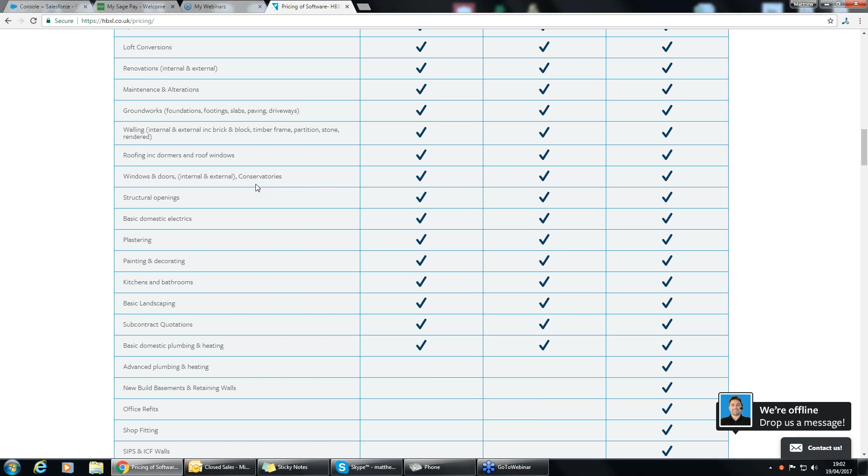So we have a PVCU bonus pack that we work with a company called Crystal. Your structural openings - now it's going to be able to quote for the likes of a steel, however you're still going to need the engineering, the engineer's report to sort that out as well. You've got your basic domestic electric, so that's first fix and second fix. Your plastering, painting and decorating, kitchens and bathrooms, basic landscaping.

Your subcontract quotations, basic domestic plumbing and heating. Then where the total toolkit and the standard stop and the advanced and the ultimate continues, you're looking at advanced plumbing and heating, so that's underfloor heating systems, boiler systems, RADs. New basements and retaining walls, office and shop refits, and SIPs and ICFs, so your structurally insulated panels.

Now, you may need the standard edition, but you also may need new basements and retaining walls. What you can do is you don't have to upgrade to the ultimate from the very beginning. You can add this in at a later date or when you need it.

Where it becomes similar again, you're looking at professional quotes covering letters and T's and C's, automatic production of 80+ professional reports, live material links to the likes of Jewson's, Travis Perkins, Graham, Keyline. So if you have trade accounts with these, what we can do is we can actually link your prices in, so there's not going to be any major faffing with prices because your agreed terms will be in the software for you.

It's going to give you a Gantt chart, labor schedules. It's going to tell you how long the job's going to take and what jobs are going to be in motion as well.

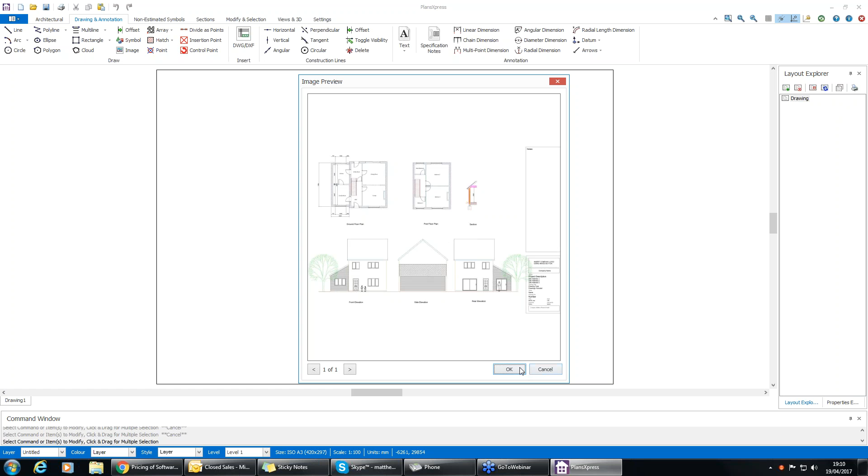If I click Open, it's going to give you an image preview, so you can start seeing what you're going to be drawing. I'm going to be drawing this extension on the side of the house—this one here, and this is my house to begin with. If I click OK, now the software is going to tell you what you've got to do next.

It's got this nice command window down in the bottom left-hand corner, saying give first corner point, which is going to be down here. As long as you hover your cursor over the bottom left-hand corner, this little blue box will turn up saying origin. Click once, and then you can drag all the way to the top.

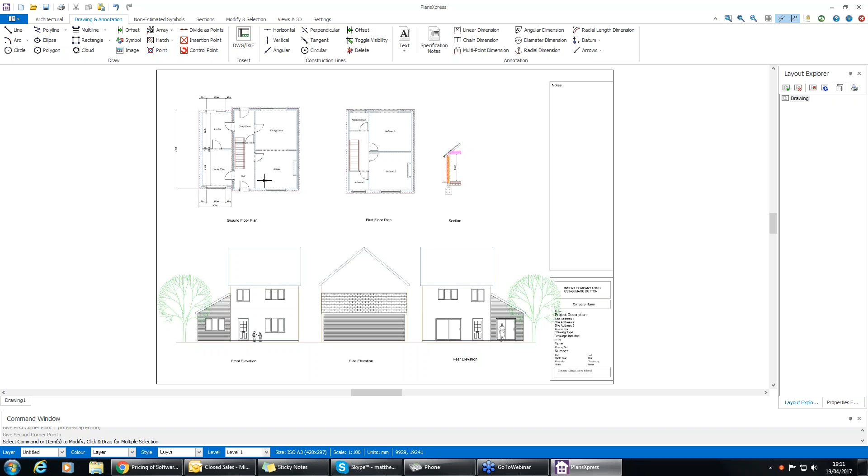Now you can see that we've got the PDF in there. It's still got no information—all it's got is just a nice picture. This could be a picture of my mum and dad for all I know, but I'm not going to estimate them.

Now the one thing you want to make sure of more than anything else is that you've got a scale on there of what something is in millimeters—it makes your life a whole lot easier. Because knowing the distance between two points is going to make sure you understand which scale you're actually working off of. To do that with the software, we have this tab here that says linear dimension, which tells you the distance between two points. I know that between here and here, that should be 1800.

So if I just click once, to make sure it's nice and straight, I can hold the Shift key so that it goes nice and straight. I can click inside there, and it's telling me that that is exactly 1800, which is perfect—that's what I want to know.

Now, the software lets you draw freehand, so you can start doing your own designs, and you can draw freehand over a trace as well—it's entirely up to you. But to make your life a little easier, we have construction lines, because the software uses something called a snapping tool, and you'll see how that works in a moment. It's just like when I went to that origin point in the bottom left-hand corner.

So first off, the construction lines are up here. You've got everything from horizontal to vertical, angular, tangent, perpendicular, and circular as well. So if you have those unique builds or architectural drawings that you need to estimate, you can use this. You can speak to the tech team as well just to make sure everything's accurate, and we can help you out as well. So first off, horizontal lines.

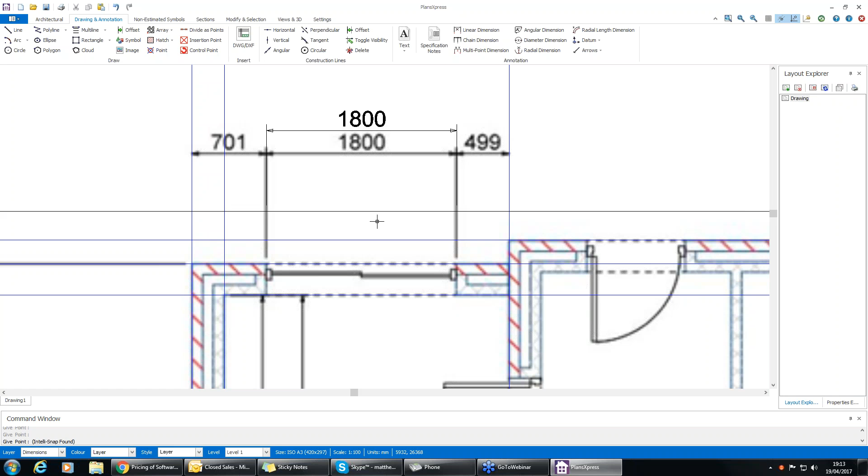What I can do is, as long as you've got a mouse scroller wheel, you can zoom in and out, which is quite handy. And if you click down the mouse, you get this little hand that grabs, so you can move yourself around. Oh, my mouse has decided to throw me all the way up. I don't know why my mouse is doing that. Terribly sorry.

What you can do is go down to the bottom. Oh, I hope this isn't constant. Terribly sorry, guys.

And there we go, we've got the walls nice and sorted out. So what we've got now is all of our construction lines in place, and we can start snapping to the corners. But like I said, I wanted to make this wall non-estimated first off.

The way I can do that is go to where it says Architectural, then External. You've got these tabs at the top of the screen: external walls, internal, feature masonry, doors, windows, openings, stairs, flooring, roofs, extended roof, attic, drainage, all the way through to chimneys and fire stops. So this first one, I'll go External and drop that down.

I know it looks like a brick and block cavity wall from here, so I'll just select brick and block cavity wall. It doesn't really matter how high it is right now because, as I said, it's going to be non-estimated. So what I've done there is selected one that's a single story, and these dimension wizards come up. The reason these come up is because this is the information it's going to take into EstimatorXpress, which I'll go through in more detail in a second. But for the benefit of this non-estimated wall, I'm just going to hit Accept Defaults.

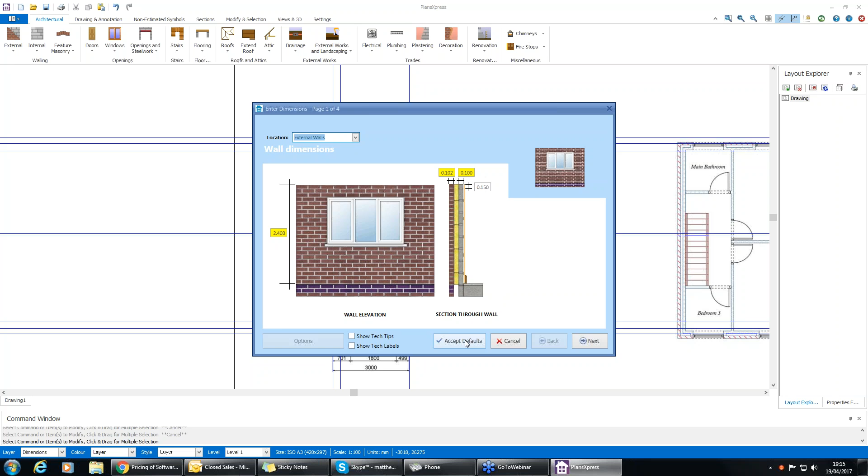So you're just basically putting in a line for the sake of it right now, and it's going to use a snapping tool. It snaps directly into that corner whilst my mouse is over the top of it, which is nice and handy. Now if I click there, I've got an arrow pointing right, telling me that the wall is pointing to the external wall. If I wanted to go down, the wall is now on the wrong side of my construction line.

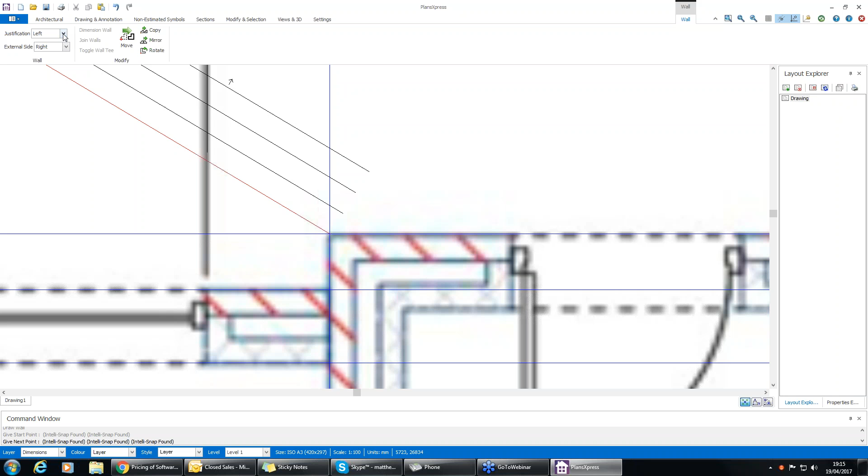This can be an accident that anybody can do. That's why in the top left-hand corner, if you follow my mouse, we've got Justification and External Side. The external side's on the right-hand side, however the justification isn't, and that just means where my corner is. So if I just change that from left to right, I've now got that external wall on the right-hand side, and I can pull that all the way down to the corner, click that in place, and if I right-click, the wall's going to go away.

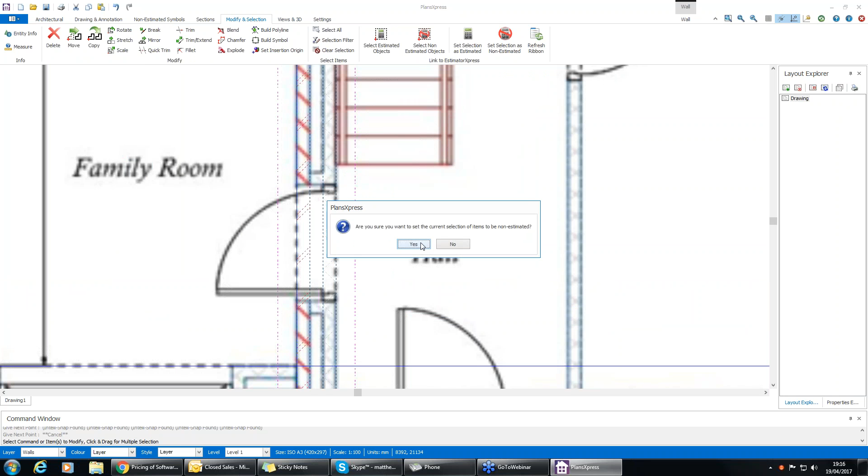Now, to make this non-estimated, all you've got to do is click once on this wall, go to Modify and Selection, and go Set Selection as Non-Estimated. Once you've clicked Yes, this wall now has no information in the middle of it, it's gone nice and bare, which is quite handy. Everything else you draw after this will be estimated, it's just this one bit, which is quite handy.

Now, going from here, we're going to start building the wall for the extension.

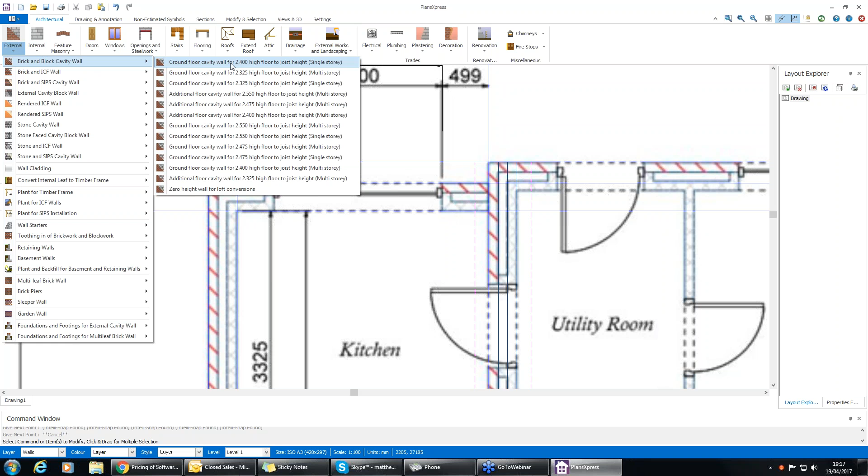Okay, so first off, going to the external wall. You'll know by how your architects design the wall, how you've designed the wall is how it's going to be built. So if I go brick and block cavity wall, single story, it's going to say it's 2.4 meters high. Now, these dimension wizards, I'll go into a bit more detail. The reason you've got the height and thicknesses is because this is what's going to take into EstimatorXpress, this is what it's now going to estimate for.

And then you've got the thickness of the external wall, 0.1025, and then the internal leaf thickness as well. What we do have for you guys is something we call Show Tech Tips and Show Tech Labels. If I turn this on, every time you tick a new box, this information in the top right-hand corner is going to tell you exactly what you're changing. So you may know exactly what you're changing from the images on screen, however somebody may be learning next to you, so it's definitely worthwhile.

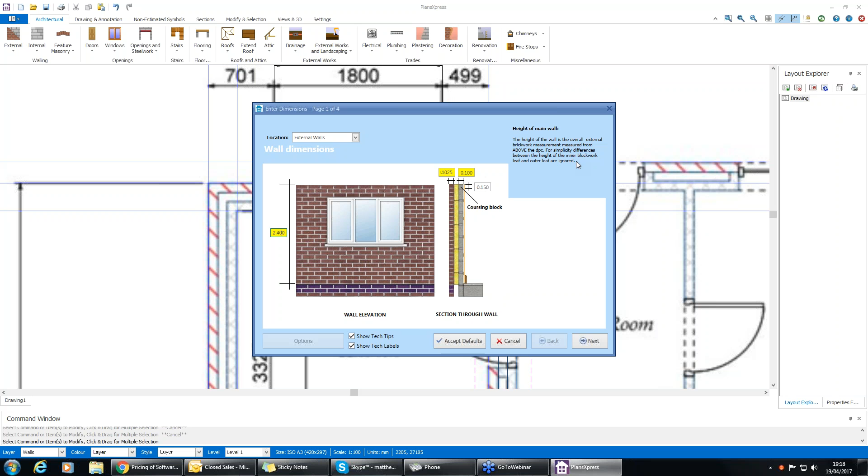So clicking next, it's going to go into the foundation details. We're saying 0.6 meters wide and 0.9 meters deep. The luxury of this is we've been working on the software for the last 17 years, working with the Federation of Master Builders, Guild of Master Craftsmen, companies and affiliations like this, we've been able to get most to building reg standard. So you're going to see a lot of it that you're already dealing with already.

Then you've got the luxury of saying, okay, we're going to be using structural concrete thickness, or you may be doing mass concrete thickness, so you may be piling it in, depending on how you do it as a business. And then the software is going to ask, is it going to be plank and strut excavation, so are you going to be supporting it? And what is the bulking of the excavated material?

Now this differs from company to company. Usually it's 1.5 because we understand soil coming out of the ground is going to expand by half. And if it's concrete, it's usually a bulking factor of 2, because when it goes into the skip, it's not going to have as much space in there as well.

Clicking next, going into the footing details. So the splash course depth, brickwork depth below splash course, height of the blockwork to outer leaf, cavity width, cavity fill depth, height of the blockwork to inner leaf, height of the coursing blocks to inner leaf, then height of the trench blocks as well.

And the software is going to ask you whether it's going to be insulated and is there a separate DPC. If that's a no, all you've got to do is just change that Y to an N, and then it's not going to quote for it when you put it into Estimator Express. But for the benefit of the demonstration, I'm going to leave that in as a yes.

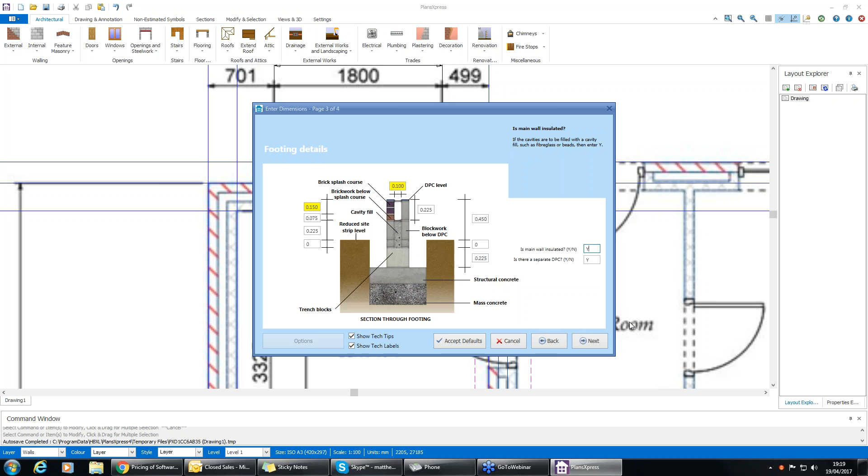And the last question it asks is the plastering and decorating. Are you going to be plastering and decorating? Yes. Number of skirting boards to be used on each wall is 1. Is the main wall skirting going to be primed? Is it going to be decorated? So it's going to be taking in your primer in that as well.

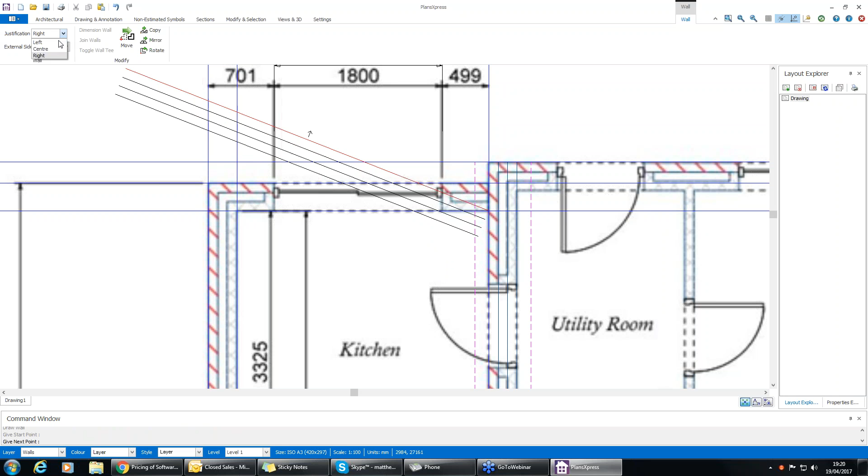And once you've clicked finish, what you can do is you can hit that, and then they're saying give a start point. So I'm going to go right into this corner here, saying my wall's on the wrong side again, so I can just change that justification to left. And that way now I know I'm going to be going into the internal walls by scrolling in and out.

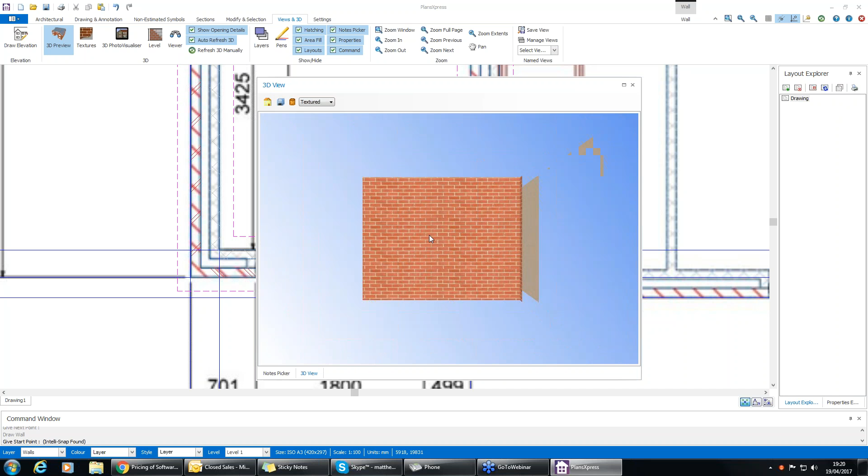And once that's there, I can then go, which is quite handy, Views and 3D, 3D preview, and if I just drag this into the middle and make it just a smidge larger, you can start seeing what we've begun to estimate. And again, like I said, this wall is now estimated, everything else is, and you'll see that when we take it into Estimator Express.

All right, instead of jumping back and forth in and out of the actual picture itself, what I'm going to do is add a few more bits and pieces so we can start seeing it in a much nicer view.

Okay, next off, what we're going to do is add flooring in. So just go to the flooring tab, hit the drop-down box, and you're going to have the list of floors that you can do. Everything from a suspended floor through to a floor cassette, floor slabs, screeding, if you're going to be doing commercial carpeting, floor tiling, depends on what you're going to be doing.

So for this one, I'm just going to go floor slabs, extension slab, and it's going to be unreinforced or reinforced. I'm going to go reinforced for this one. Turn on those tech tips and tech labels. Thickness of the sand blinding, thickness of the sub base.

Thickness of the slab. Is there a damp-proof membrane? If there is, what's the overlap of that? Usually 0.5 meter. Is there insulation to the underside of the slab? Is there reinforcement to the bottom of the slab? Is there reinforcement to the top? Is the slab power float finished, yes or no?

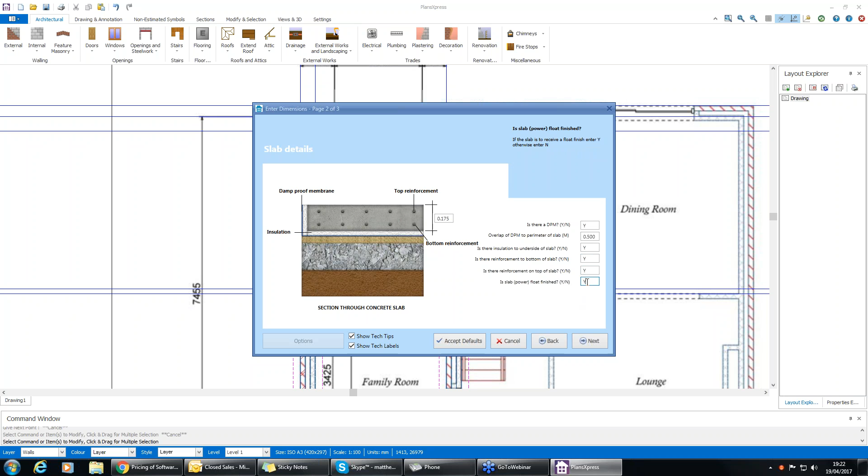Now on this next page, the software's going to ask you the number of hours that you're going to be requiring the excavator, the plate compactor, the wheelbarrow. The reason why it's asking you these questions is because of the undeniable fact that wear and tear happens, and you're going to be paying for a couple of these things as well to have them brought to and from site. Now it seems it's all zeroed out because the software doesn't actually know how big the slab is yet.

Because it could be something that you can do in a day, or it may be something you have to do over the course of two days. But it seems you haven't drawn it in yet, so it doesn't know. You can add this in yourself if you like, but you can leave it at 0 and the software will do the rest of the work.

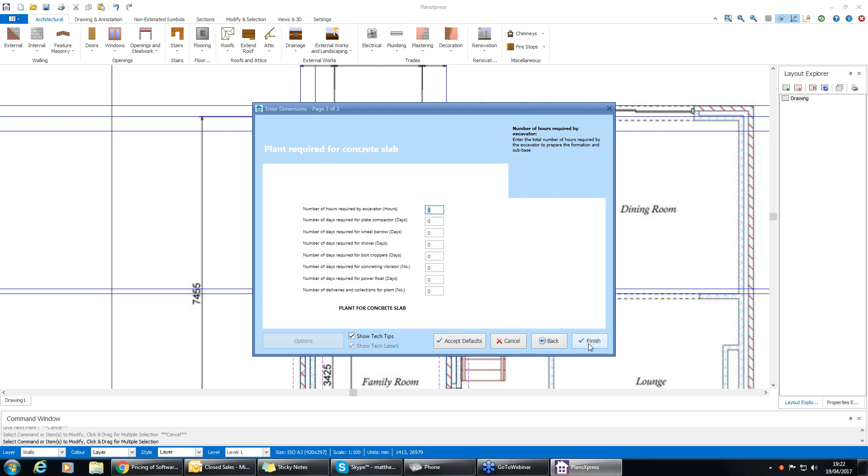So if I hit finish, the software is then telling me to give the first corner of the floor on supporting wall, so I can go once, second corner, and then instead of going all the way around, I can just drag it all the way down to the bottom, which is quite handy. I can pop that one in there.

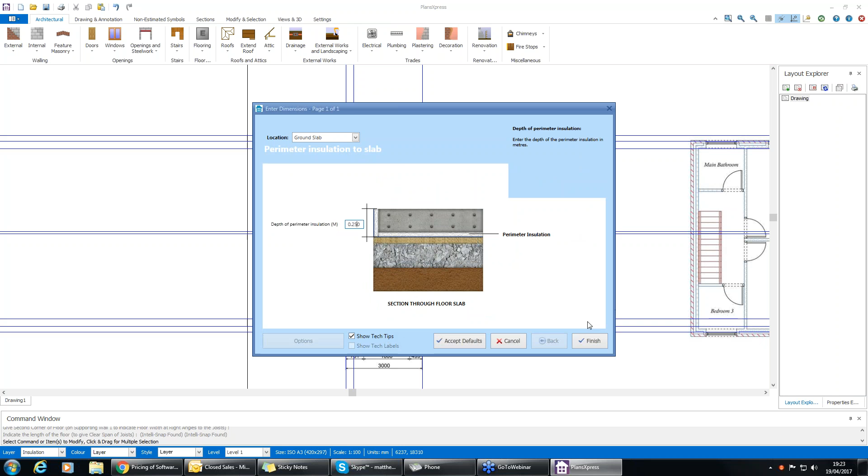Do I want to place perimeter insulation around the slab? Yes, I do. It's just going to ask me about the depth of the perimeter insulation, and then I can start going around, getting the corners here. And now, as you can see, that pink line has turned into a nice grey line as well.

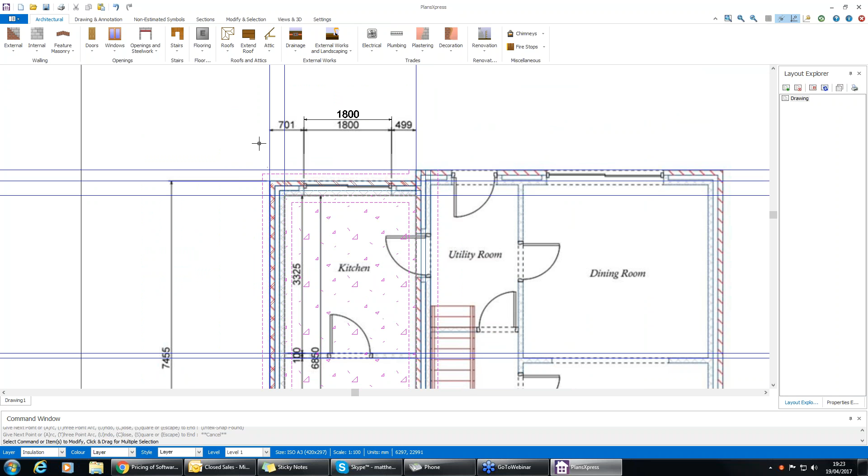All right, going into the internal wall, hit the drop-down box depending on how you're going to be building this internal wall, whether it's going to be an internal cavity block wall, a block wall, a stud wall, or a metal stud partition. I'm going to be doing that one there, and then I'm going to add in the information that's relevant.

The reason why it's not asking for the area of space in this door opening is because the moment you drop a door in through PlansXpress, the software's going to calculate the rest of it. So what we've got there is a wall at 2.4 meters high, 600 mil wide studding centers, and the width of the wall is going to be 100 mil. Does the door opening require a timber subframe?

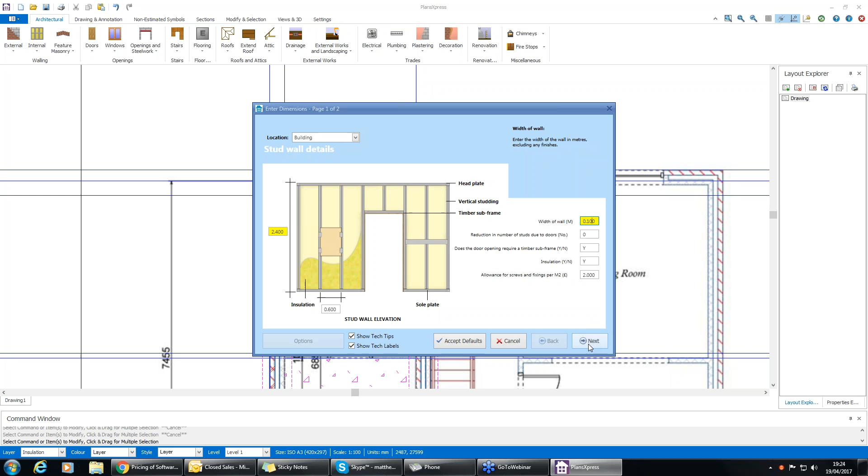Yes or no. Insulation, yes or no. Allowance for screws and fixings per square meter. So every per square meter you've got £2 in there for the screws. Okay, hitting next, stud wall and plastering details.

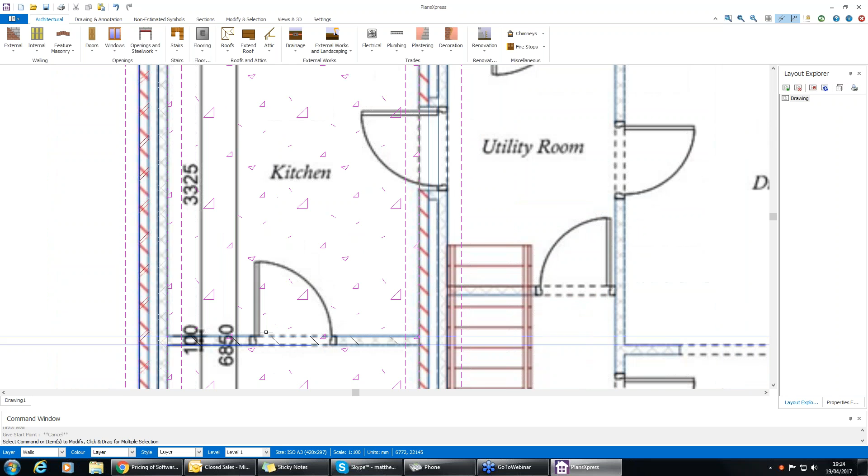Is it going to be plastered? Is it going to be decorated? Is there going to be a skirting either side, yes or no? And once you've hit finish, you can just go in there, click in, go from one side to the other, and now we've got a nice wall in there as well.

So what we've got now, if I go into Views & 3D, is something that looks like this. We've got our front wall, back wall, internal wall, our flooring, and our parallel wall as well. If I hit X, what I can do is I can now add some windows and doors in there.

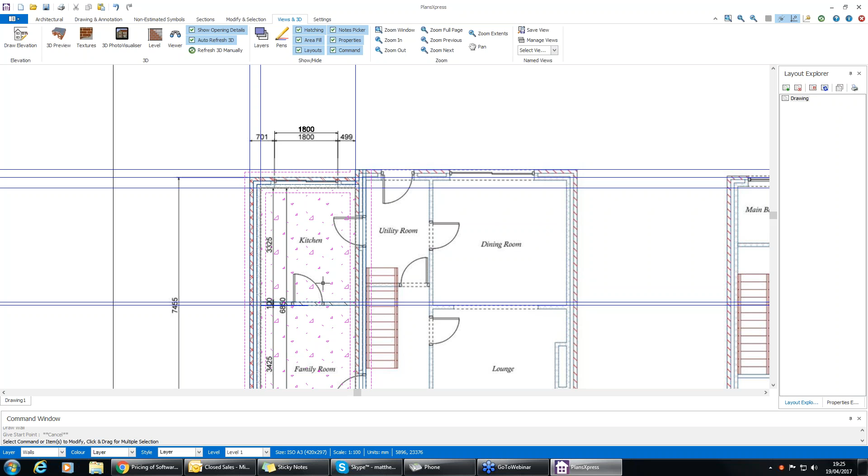So first off, let's go with these internal doors. So architectural, go to the doors. I know they're going to be internal, there's going to be a typical panel door. Now the software is going to ask you whether that's going to go into studding or block work. This is going to determine whether you're going to need lintels and so on.

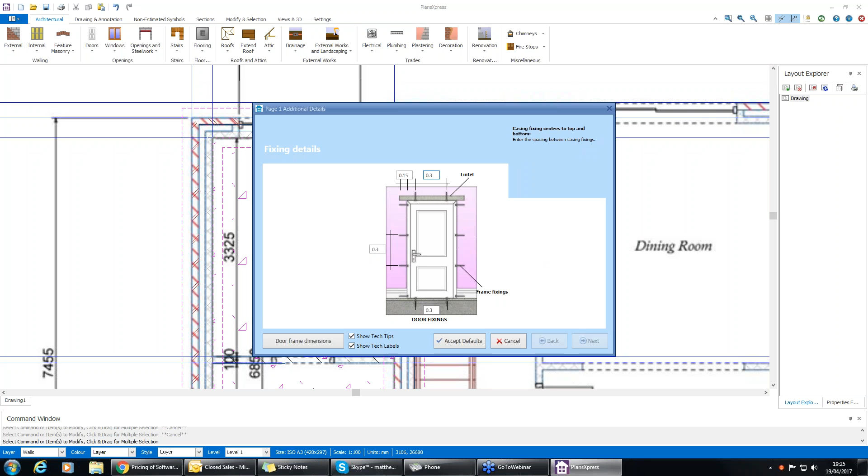So first off, if we go into block work, it's one of those tech tips. So it's going to ask me about the height, the width. If I want to go into the fixing details as well, so I can show tech labels as well: lintel, frame fixings, casing fixings, lintel bearing each end, casing fixings as well, door fixings.

Reveal and jamb details, plastering and threshold details, and the decoration specification as well.

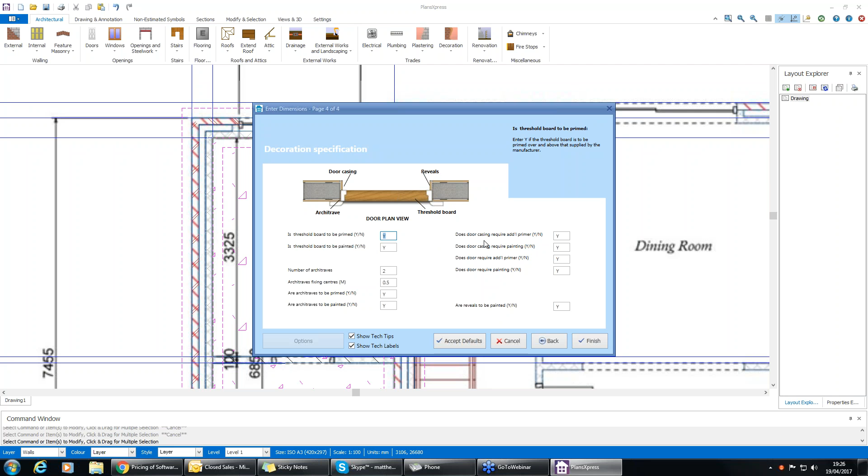Okay, are you going to be priming and decorating? Now the luxury is those 4 pages are the exact same with all doors and all windows. It's going to go into the threshold, okay, your decoration, and so on.

And once I've hit finished, what I can do is I can start pulling that door in there. I can zoom in, make sure that it's right on point. And then the software is going to ask me whether I want to have the door swinging any which way. And it's going to be swinging in that way.

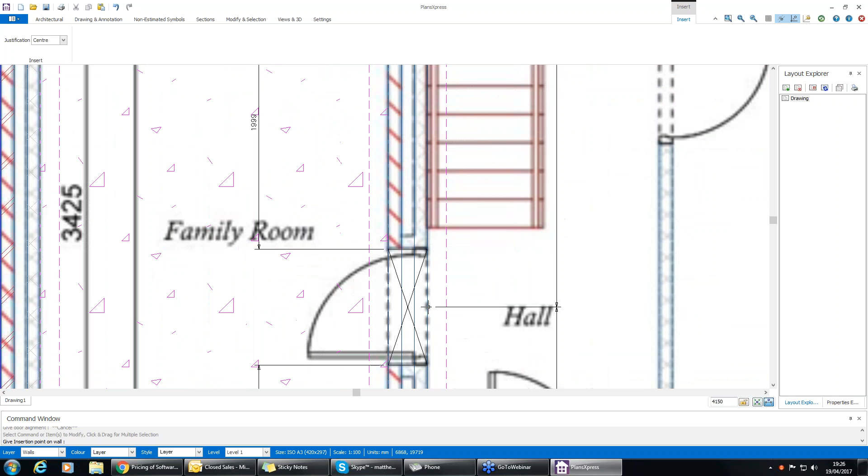All right. And then again, drop another one in there. Going this way this time.

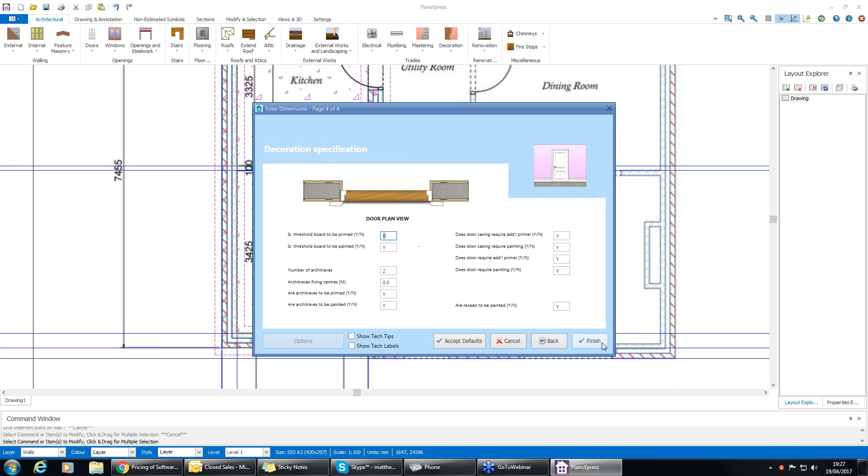Now, again, we can go into the architectural, we can go into doors, internal doors, and then we can go into studding this time. And again, the exact same information as last time, which is quite handy. You know if it's going to be all the same, you can hit finish, and you can start going and making sure that your door is in the right place.

And then views and 3D, you can start seeing some nice white doors there as well, which is handy. All right.

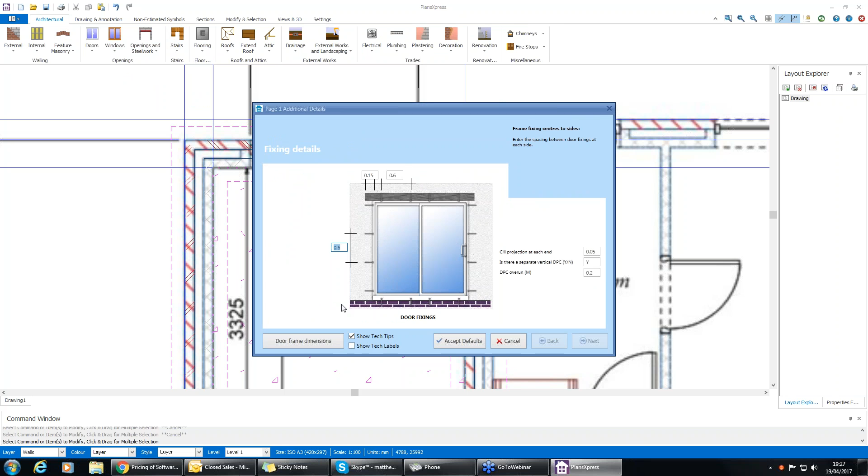Going from here, we're going to have a nice patio door in the back, which is quite handy. So door, patio doors, 1800 mil wide. We select that one. And again, I don't have to reiterate again and again, but it's all the same questions.

Which is very handy. And the moment you've done that, if you zoom in, the door is going to ask you which way you would like it to slide as well. So I'm going to have it sliding that way, which is handy.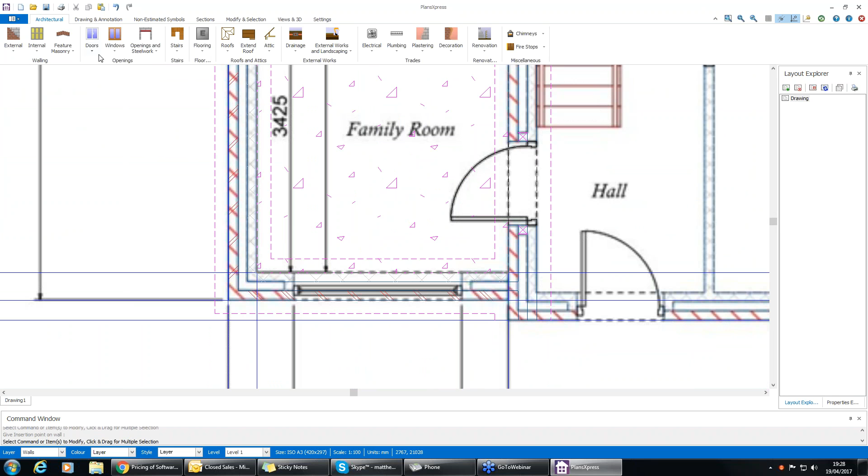And then the front, we get to select a window. Now this can be, oh no, that's a door, sorry. Just looked like a window then. So this could be anything from softwood all the way through to PVCU.

Okay, we do work with Crystal Direct as well, as I said, so you can start choosing and selecting a nice window. Okay, so if I were to do it like that, you can start seeing the windows that we're going to be working with within Crystal Direct as well.

And the luxury of Crystal Direct is if you select one of their windows, what they will do is they will manufacture it and they'll get to you on site. Okay, so that's something that we do like.

Okay, so you can go first off width, make sure that we've got the correct width there. So I know it's going to be 1800. Okay, and I can still start scrolling through. I can select the color.

So if I want it to just be white, we can leave it there as white, or we can have it as black, brown, blue, mahogany, depending on how you want it to look. Okay, the height as well. So we can start saying, okay, then we actually want it to be about, oh no, that's a little bit too short. There we go, that looks a little bit nicer.

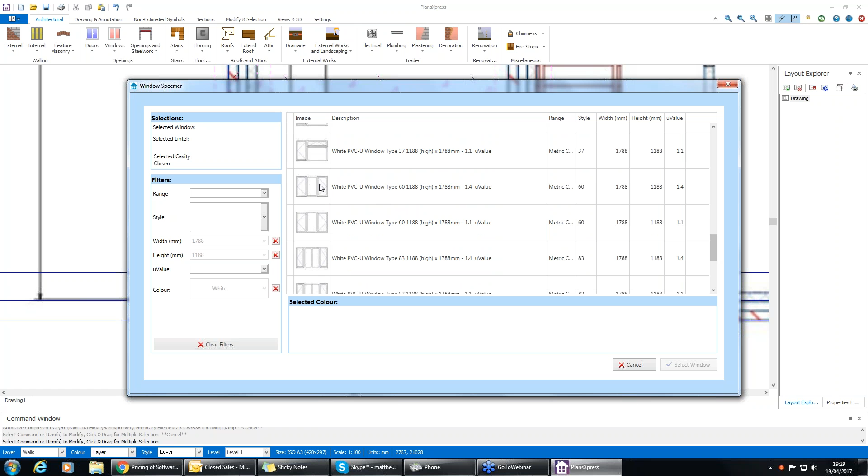Then we can start looking at the windows that we've got here as well. Okay, if I just said, okay, then I want this one here, which is quite handy. I can hit select window, and the software is then going to generate the relevant lintel that it's going to need as well. Okay, so it's going to select it from everything that you've given it, which is quite handy.

And then the cavity closers and that as well. So once you've actually ordered it, it comes with everything that you've actually just seen here. And once you hit select and finish, it's going to ask me the relevant information again with my fixing details.

And then I can drop that window in there, which is going to be quite handy. And what should happen is if I go into views and 3D, it should look very relevant to how we're going to be estimating as well. Okay.

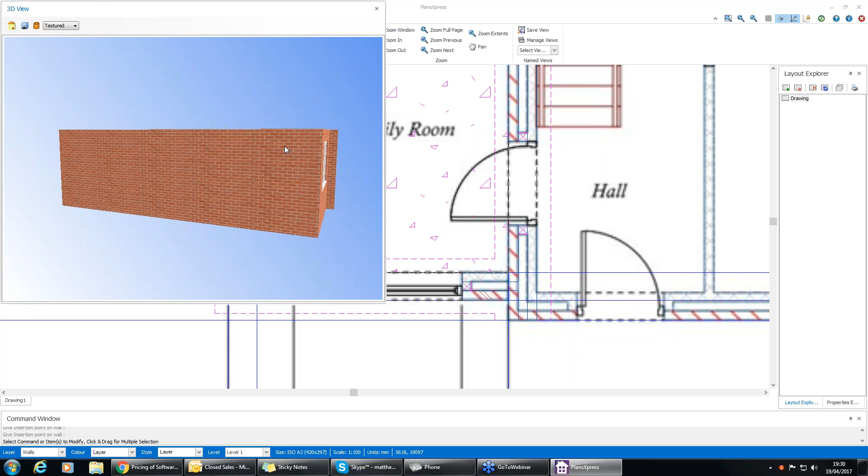You can start popping in some electrical works as well. So if I go electrical, we can have a couple of double sockets, okay, downstairs. And we can start doing that so they point outwards, if I remember correctly.

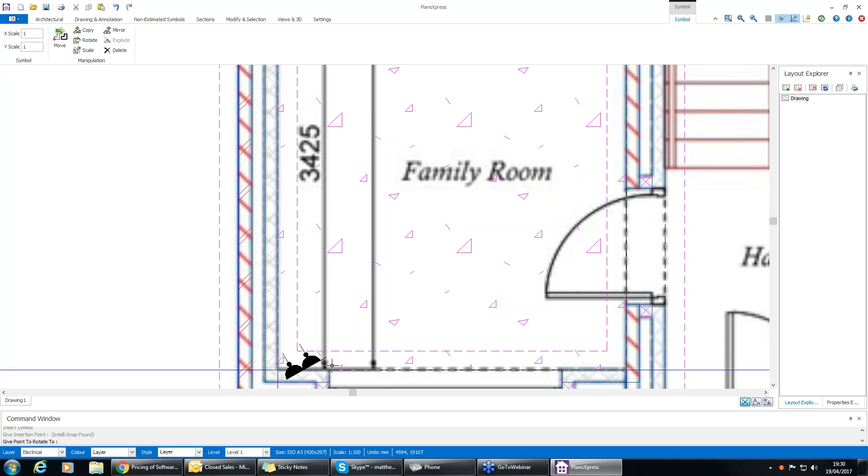So at least that way, you're going to be quoting for your electrics in there as well, which is quite handy and what everybody wants.

Okay, last but not least, you want to stick a roof on top as well. If I drop down a roof, you can have everything from a cut roof or a truss roof, depending on how you're going to be building it or bringing it in. And then you can start choosing the typical pitch as well.

Now the software is going to give you these four pitches. You may have a different pitch depending on how you're building the house. For the demonstration, I'm just going to have a typical 35-degree pitch, but you can change it. So if you want it to be, say, 27 degrees, just change it to 27.

Now, the reason it's starting to ask you about whether it's got an elevation of a barn hip is because right now it's just asking you whether it's going to be a cut roof or a truss roof. It's going to give you all elements of potentially any roof you could be building. So once you do draw it out and get to the very end, it's going to be able to calculate the right roof for you.

Okay, so show tech tips. You've then got height of the gable to underside of the barn hip, thickness of the roof structural information, soffit width of the gables, soffit width to the eaves. You can go into the timber and the roof strap details, so your roof is out there.

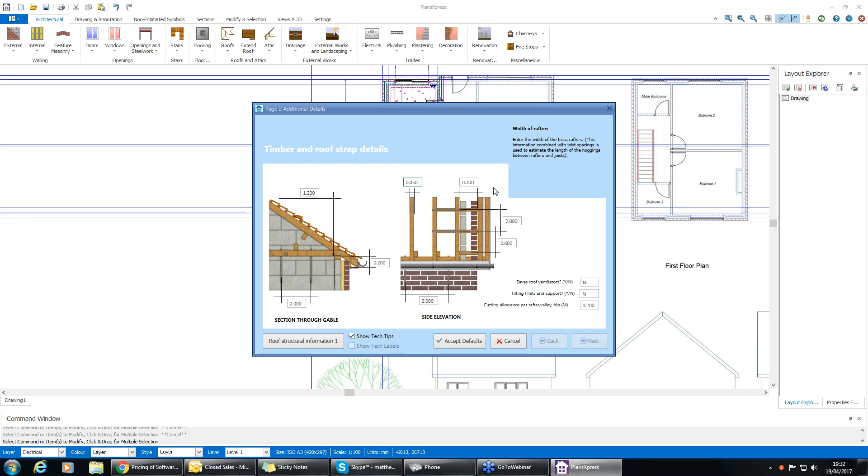You can see the spacing of the joist noggins. You can see the gable straps at joist level centers. It's going to start asking you a lot of the relevant information that you kind of go through yourself. So going from there, you're going to go into the second roof structural information.

So rafter centers, joist centers, height of the barge boards as well. Are there eaves, fascia, barge boards? You can go into the guttering details as well, depending on how much guttering you're going to need.

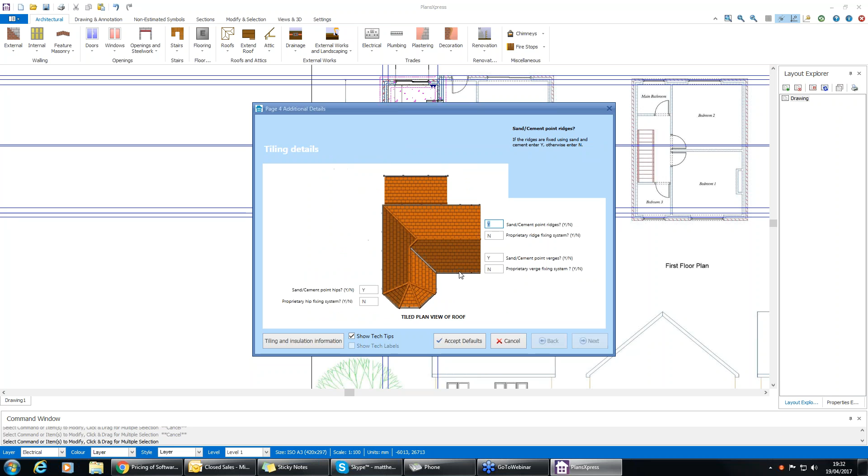Tiling and insulation information, so sand and cement point hips. And then last but not least, again, the roof finishes. Are you going to be priming the barge boards and fascias? Yes or no? Decorating barge boards and fascias?

Most likely not, because it's usually PVCU, and that just looks really tacky when you paint on it, really.

Okay, and once you hit finish, you can either choose an apex roof, a hip roof, apex roof with a barn hip, lean-to roof, or a lean-to roof with a hip end. If you have wraparound roofs, just give us a call and we can actually help you create those within the software as well. That's something we're actually very good at helping with.

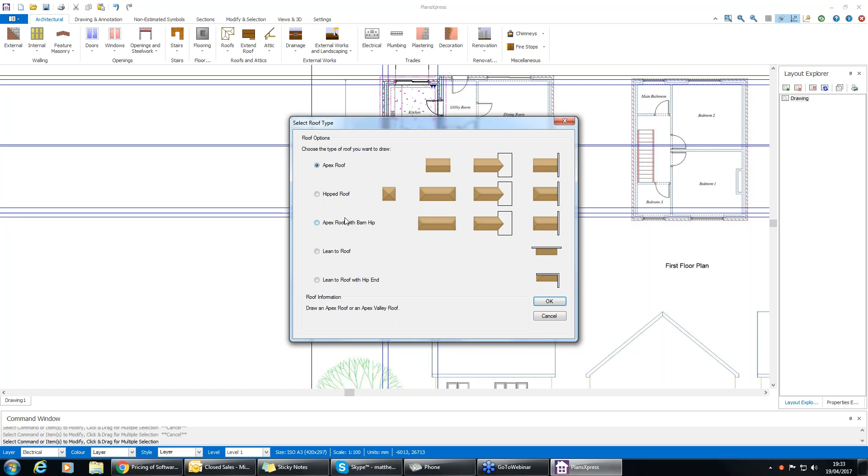Okay, so if I just go lean-to roof for now, click OK. Software's telling me to indicate the line that the roof is on. So indicate the wall line, sorry, it's going to be this wall here.

Go to the outer corner of the building, inner corner of the building for the width, and then — oh God almighty, terribly sorry guys — and then the length as well.

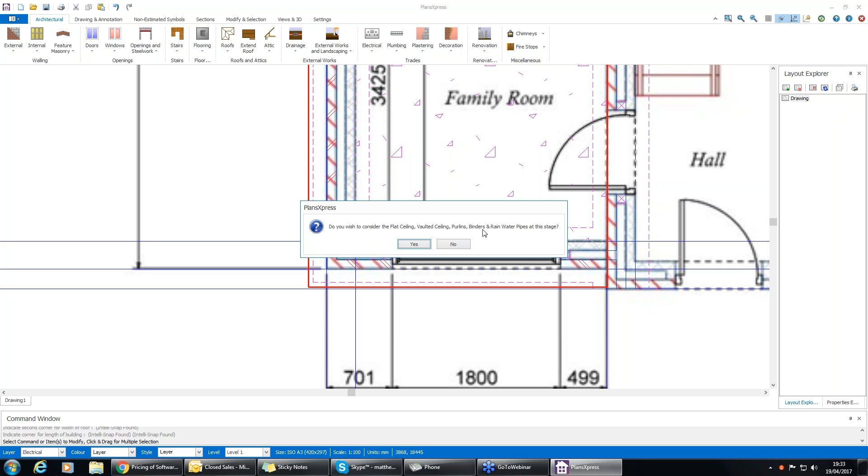And do I wish to consider the flat ceiling, the vaulted ceiling, purlins, binders, and rainwater pipes at this stage? For now, I'm just going to go no, just so we can start seeing this into PlansXpress, to Estimator Express.

And as you can see, it's filled in the gable for you as well, so it's going to quote for that. But you've now got your internals.

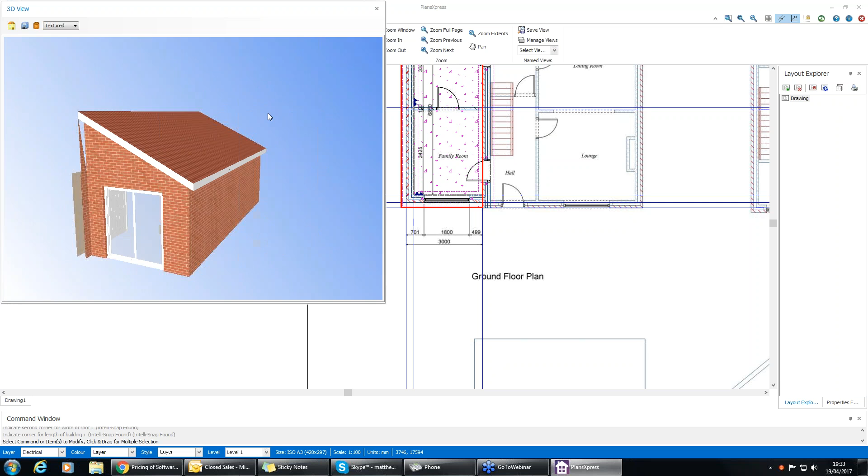And the luxury is, if you're going to be plastering the internal wall as well, depending on whether it's going to be a garage or actually a family room, you can start going into the renovation and the plastering and decoration aspect as well.

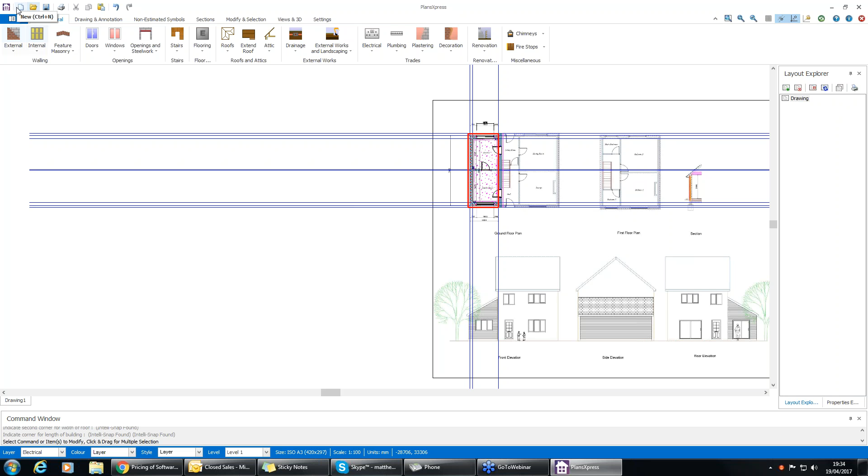Okay, but for the benefit, want to speed this along, want to make sure that we can go into Estimator Express now. And to save this, all you've got to do is just go to the top left-hand corner, hit the nice big floppy disk, which is quite handy.

Select a place where we're going to save it. So if I go desktop, I can go Essentials Demonstration, hit save, and now I can close my way out of this.

Okay, and now what I'm going to do is go into Estimator Express. Whilst that's loading up, does anybody have any questions right now?

Just leave it a couple of moments longer. Okay, no questions, I like that. Must be doing a pretty decent job.

Okay, so this is Estimator Express. We have a fantastic update coming out. I'm not going to be telling you what it is, you're just going to have to wait and see. But that's coming out in June, and we are very excited about it.

What the software will tell you is what version you own as well, depending on these CDs. Now it's not gospel that if these aren't bright, it's not on within your software, so don't live and die by this, but it does give you an idea of what you're running. As you can see, I'm running the Ultimate version, so it's going to be showing everything from my PVCU bonus pack through to the renovation. That comes standard anyway - the basements, office and shop refits, my power pack, stage payment, plumbing and heating, SIPs, and the invoice generator.

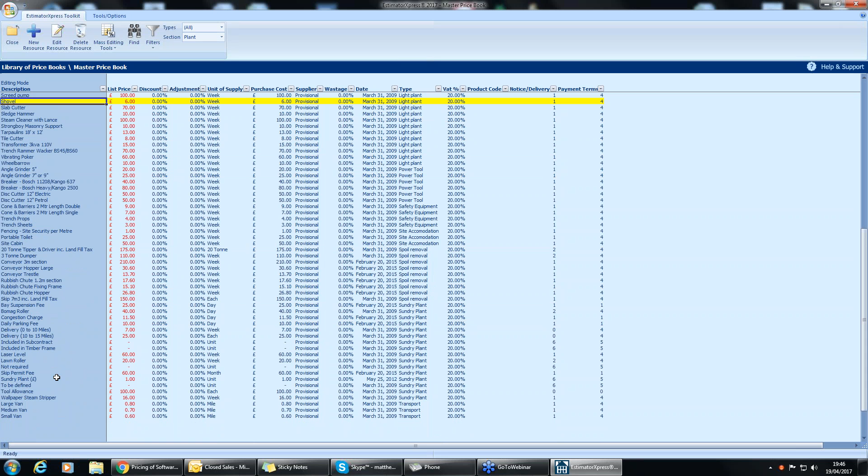It goes into your wheelbarrows, deliveries, parking as well, whether you're going to need to park on site, your skip permits too, depending on how much you're paying for your skip permits. The ones you've got to look at as well are the big ones, so the likes of your £350, your £300 ones.

We've got a JCB digger in here with a driver for a day at £300. Now if you're paying, say, £500 a day for a JCB digger and a man, and you've got the software in here at £300 a day, by the end of the week you've costed yourself out of £1,000, and you'll feel that on the wallet. So just make sure this is correct, especially on the big ones, just to cover you from what you're actually using.

So that's your prices, that's your profit inflation, and now what I want to show you is how the software is going to import and estimate that drawing that we've done within Estimator Express. So just close again, go back, and how to do this is you go into My Estimates.

You've got the cost excluding profit and VAT, cost including profit but excluding VAT, and any comments about the job. We understand that you may be estimating at 1 o'clock in the morning because you need to get something sorted, so there is a box there where you can leave yourself a comment. So the next time you turn on your software, you can go in and think, actually the subcontractor price needs shifting, or plumbing needs reviewing, something like that, because you may have made a mistake. You want to make sure that doesn't come off, so you can leave yourself almost like a footnote.

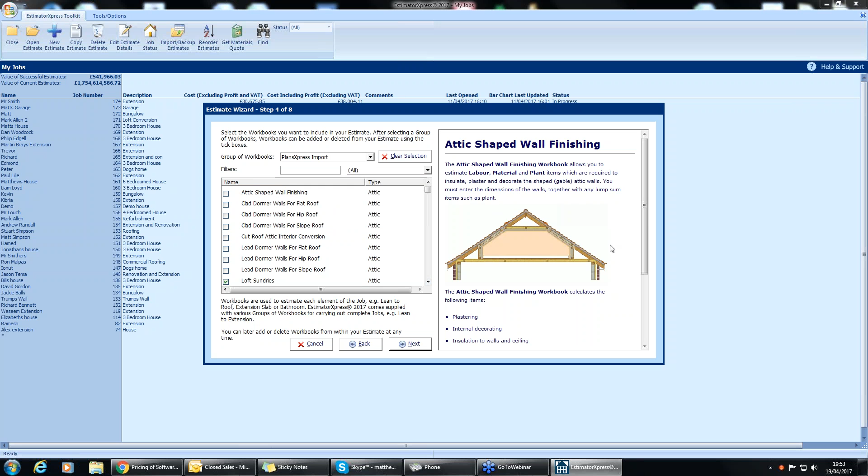But if I wanted to estimate this attic-shaped wall finishing, this little image here is going to tell you exactly what you're going to be estimating for - the plastering, the internal decorating, insulation to walls and ceiling, plus the labor associated with the above.

Clicking next, I'm going to be selecting a start date for the job, so the Gantt chart is going to be a little bit more accurate. So I'll say I want this to start on the 26th of June. And the chart type is going to be a small house - it's going to be a large house renovation, small extension. That's what I'm going to use this time.

Click next, pop in the details - so I'm just going to go Mr. Smith, completely random, why not? And then you would fill out the relevant information about Mr. Smith. Click next, confirming your profit markup.

As you saw me earlier changing that template to 27%, I may want to change it to 30 this time because I want to make a little bit more money off the labor. And then last but not least, your inflation - making sure that's correct.

Once you've hit finish, you get to sit back and allow the software to actually do its work now - it's going to start estimating everything you've drawn up within PlansXpress. Depending on the size of the job you've drawn up compared to what you're going to be estimating, that really decides on how long this will take.

Just going to mute a second so I can have a drink of coffee.

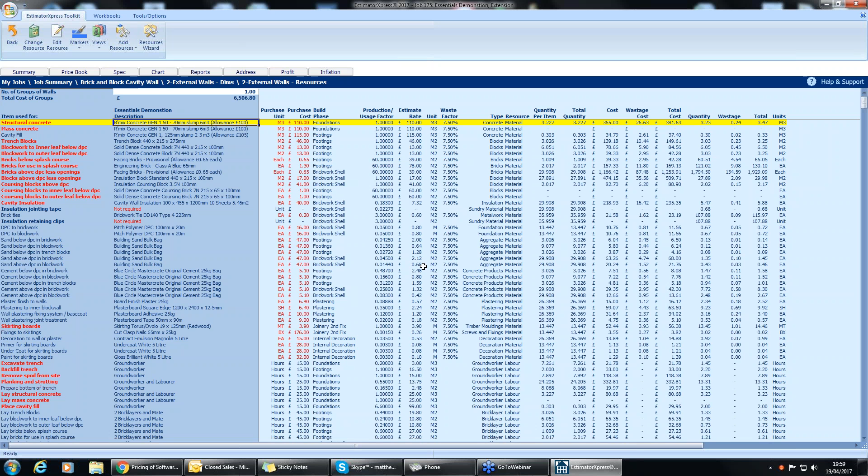Now if I go to View Resources Output, I can start seeing the materials that are being used - everything from insulation joining tape to insulation retaining clips, through to your brick and block, even going down to mini digger and driver, shovel, skip needed as well. If you're not going to be using a mini digger and driver and you're going to have somebody digging it out, all you've got to do is just go not required, and then you can add in your own resource at the top as well. So you can add in labor, and it's going to be a guy digging a trench. That's fine, you can deal with that, that's not a problem. But as I said, we've got a £6,500 wall.

What I'm going to do is go - we've got the facing bricks here, and that's above DPC, so there are more of these being used. To change the 65 pence brick, all I've got to do is just double click, and it's going to give me a list of the bricks that I have, including my banana brick up at the top. And once I click that, the software is going to ask me one question and one question alone.

Usage. How many bricks do you use per meter square? Now you're either going to know this or you're not. More likely than not you are going to know this. So it's usually between 50 and 60, especially when it comes to bricks anyway.

And once you've clicked OK, that £6,500 wall then turns into £5,756 because we've changed the brick and we've got the banana brick in there. So I hope that answers how you can manipulate and change materials, and you can do the same for your laborers as well with the exact same process.

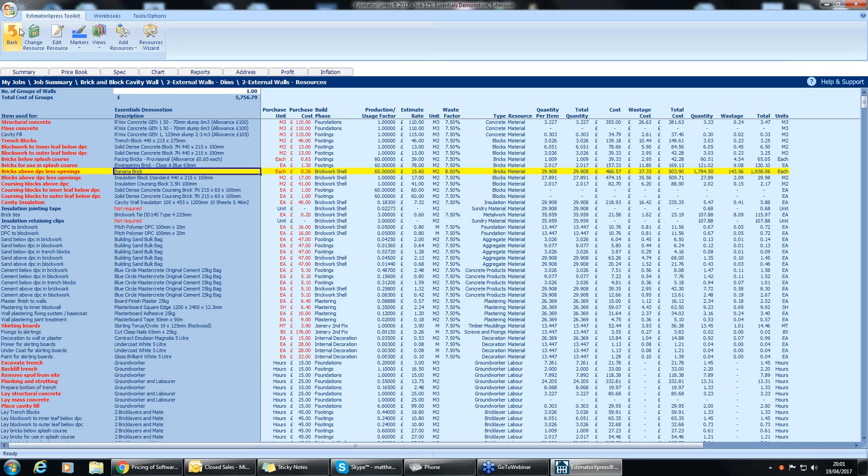Okay, once you go back, close again. Is this wall now complete? Yes, it is. Perfect.

And once you do that over the course of the job, you can then start going into the chart and the reports, and that's what I'm going to go into now. So first off, the chart.

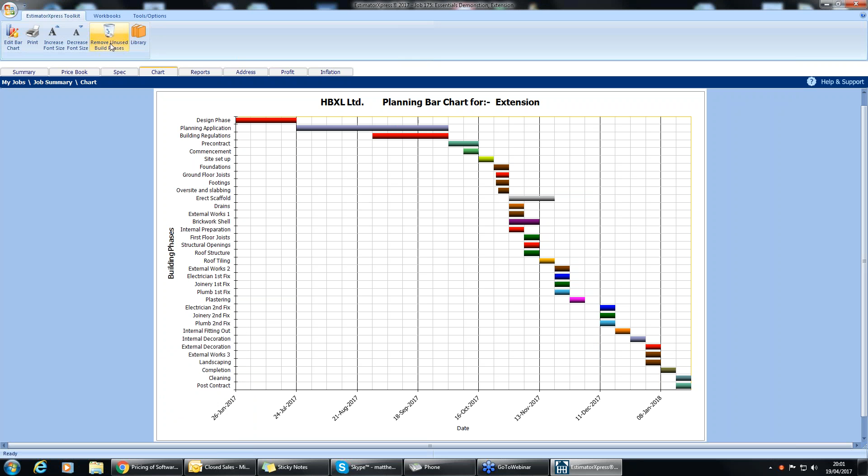We all know that I have not estimated for all of this, so some of this is going to be inaccurate, but over the course of an entire job, what you've drawn up, what you've estimated for, your chart is going to look something like this. But it seems mine doesn't. I can go in there, I can go to remove unused build phases, so it's going to take out all of this, hit OK, and that's what my chart looks like. Okay, so it looks more realistic now.

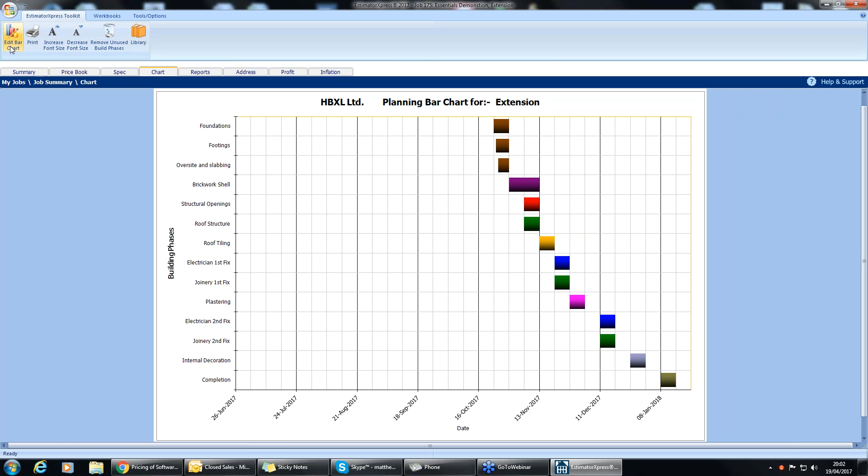I can go to edit bar chart, and if I do want to change anything, just say I want to bring this foundations all the way back to the top, all I've got to do is where it says week, I can drag that all the way back to week 1. Doesn't mean I'm going to have to do it with every one. All I've got to do is hit the cascade button and then refresh. So the software is then going to do the rest of it for me, which is quite handy.

And you can go in and you can manipulate this as much as you want, just in case you've done the oversite and slabbing and the brickwork shell has been gone by 2 weeks. So you've got to put that back 2 weeks, hit cascade, hit refresh, and you get the gist.

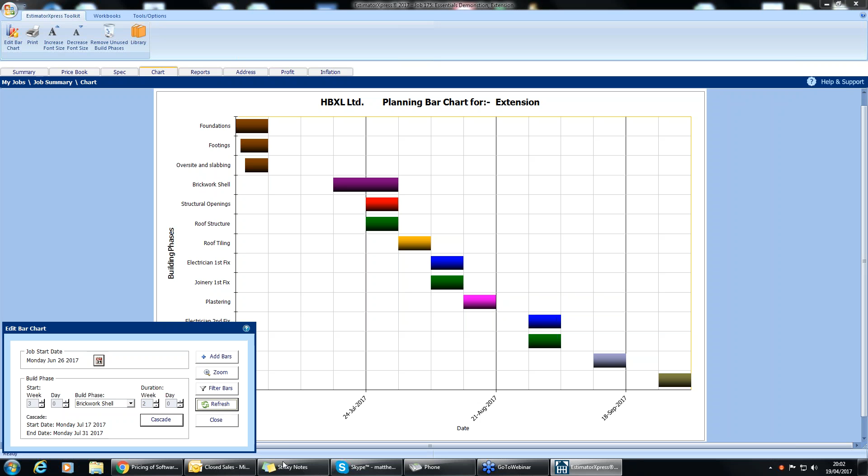Okay, going from the chart, we can go to the report section. This is the money end of the software. This is when you're going to start seeing exactly what you can start doing whilst following your own prices, okay, and what you can start seeing exactly how much you're going to be making over the course of the job as well. So first off, you can start seeing your cash flow.

So if I just double click down here, you're going to start seeing the dates you're going to be paying out and the accumulative costs of that as well. Now, if I go and drag down build phase, you can now start seeing exactly what you're going to be doing and what you're going to be paying, okay, and then the accumulative cash. So you can start seeing exactly how your money is going to be moving over the course of the job.

Then on the flip side of that, you can start seeing your profit forecast as well. So if I double click that one there, you're going to start seeing how you're making your money over the course of the job and the accumulative cost over that as well. So for that £17,500 job, you're making £4,200 at the moment. This is before the rest of the job's going in. And again, you can drag in your build phase and start seeing exactly what you're making on which part of the jobs.

Start talking to your merchants through the software as well, through the likes of materials used. Now, if I double click this one here, what you're going to see is which build phase is going to be used, okay? What materials you're going to be using within that build phase, how much you're actually spending on these, how much you buy the materials for, so the purchase cost, the purchase units as well, so how you buy them in. And then the software is going to tell you the quantity required against the wastage, then the order quantity.

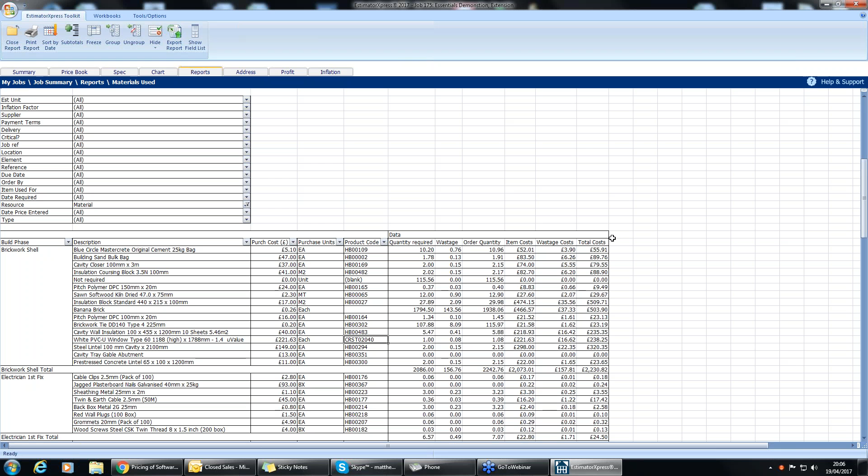Close that report. Showing you the stage payment calculator. We've got the stage payment calculator up there. Like I said, you may be spending 45 minutes to an hour trying to calculate all this out. That's the last thing you want to be doing.

So we've got the stage payment calculator up there. One click, you can start telling the software, okay then, I want it to be either at the start or the end of build phases, or I want it to be an interim period of every 4 days. You can change it to every 5 days if you wanted to. Start the billing date, you can say it's going to be the 26th of June. You can add your sales price, including inflation or not. The moment you hit print, the software is going to generate it for you.

And then your final quote as well, what you're going to be handing over to the client. So you've got your quote wizard. It's just telling me right now that I've not put enough information about Mr. Smith. I can hit yes.

We've now got your quote's going to look something like this. It's going to have a heading, a brief description, materials that are going to be going into it, and the total cost excluding VAT as well. So you're going to have your phase totals in there as well.

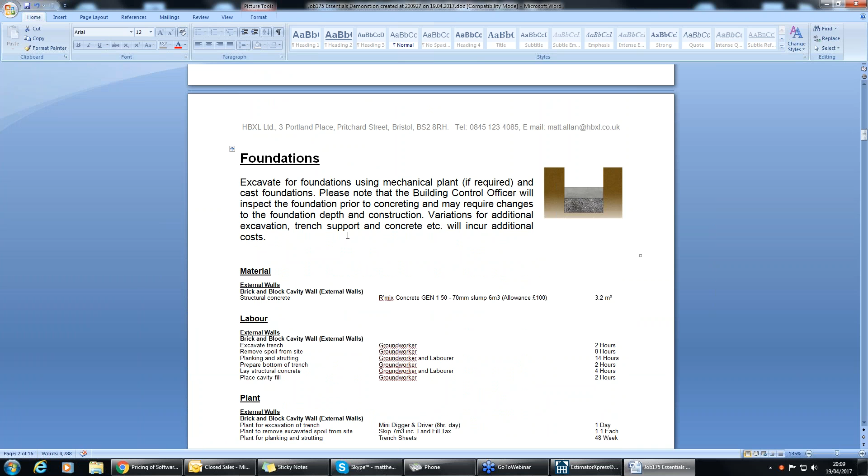And then your quote's going to look something like this. So if I just zoom in a second and scroll down, you're going to have the foundations, a brief description of the foundations, a nice picture, the material, the labor, your plant, and the total cost excluding VAT for that as well.

Now, as I said, you can still manipulate it from here. You can take out as much as you want. You can delete that, you can add in with tea and biscuits—biscuitas, making it sound a little bit more Spanish. It's entirely up to you. You can delete these photos.

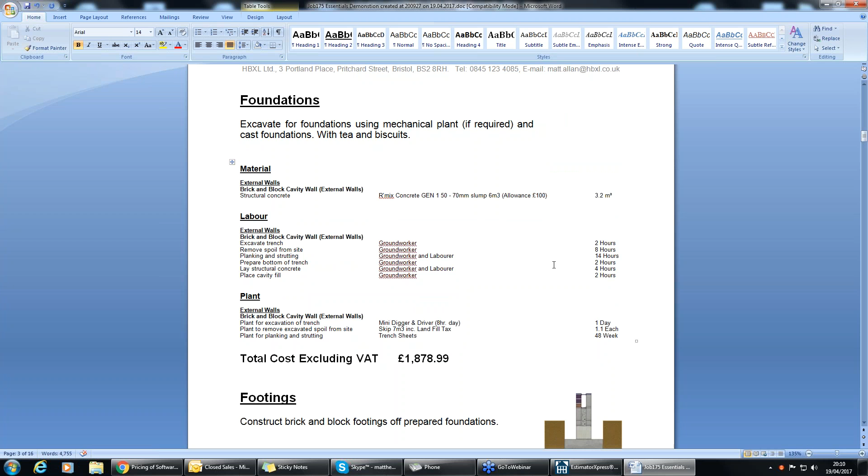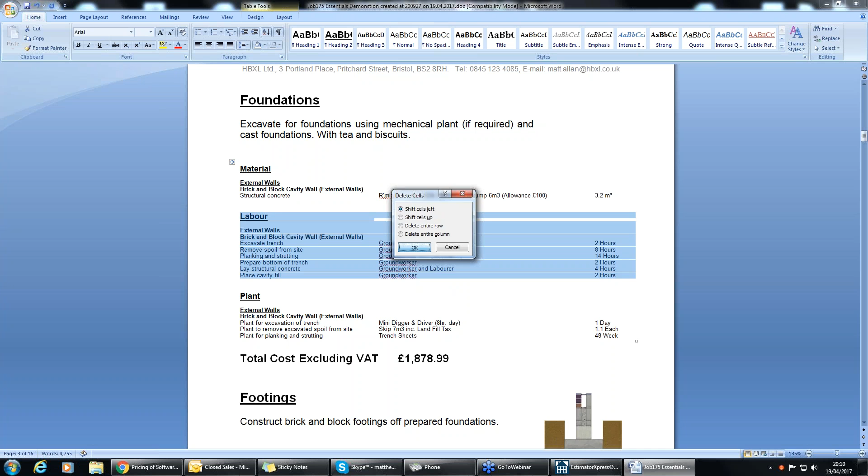So as I said, you want to make this ideal for you and your business. You can even take out this information here as well, which is quite handy. If you don't want it, take it out.

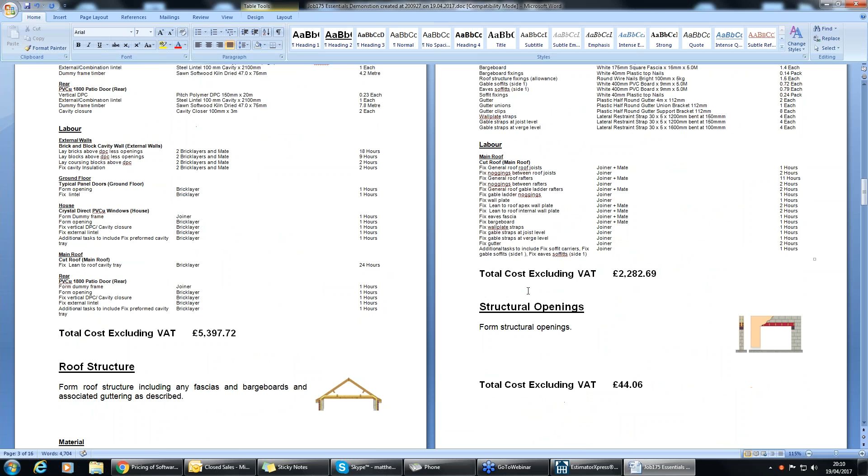And then it's going to go in chronological order of how the build is going to happen as well. So your foundations, your footings, oversite and slabbing, the brickwork shell. Then it's going to go into the roof structure, any structural openings that need to be happening, the roof tiling.

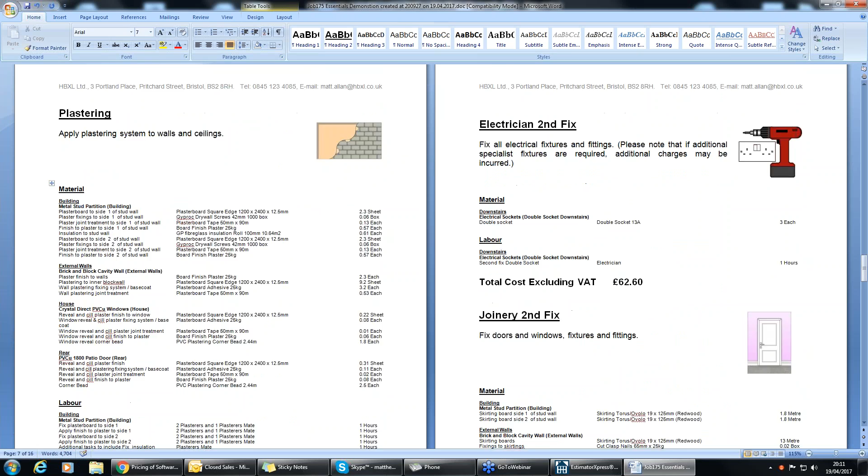Electrical first fix, joinery first fix, plastering, electrical second fix, joinery second fix.

Then at the very end, internal decoration, what goes into that, the completion, and then it's going to start giving you the prices as well. So total cost excluding VAT, what the VAT is, and the total cost including VAT as well.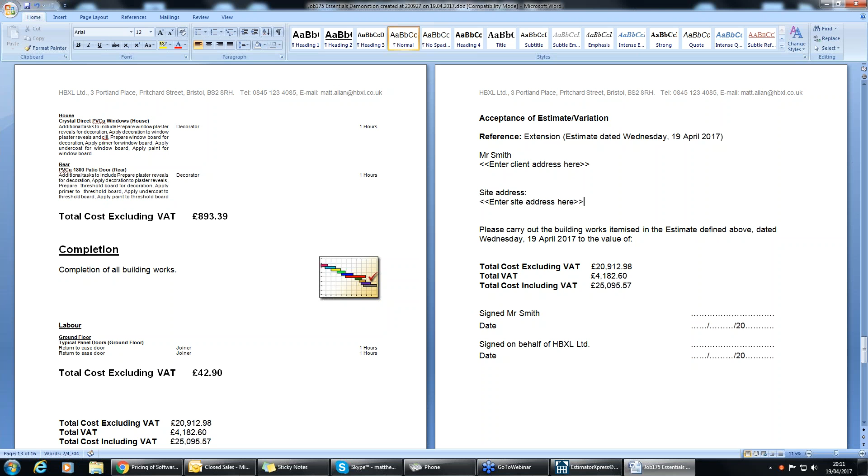And if you're a client and you're happy about this, there's a nice acceptance of estimate and variation tab. You can even change the name of that if you want to—it's entirely up to you. And there's a second one as well, so you're both agreeing and you're both signing it off.

So your client can come back to you and say, where's the ceramic dolphin on top of the garage? And you can say, look, you said you were going to pay me at this date—where's the money? And that's Estimator Express as well.

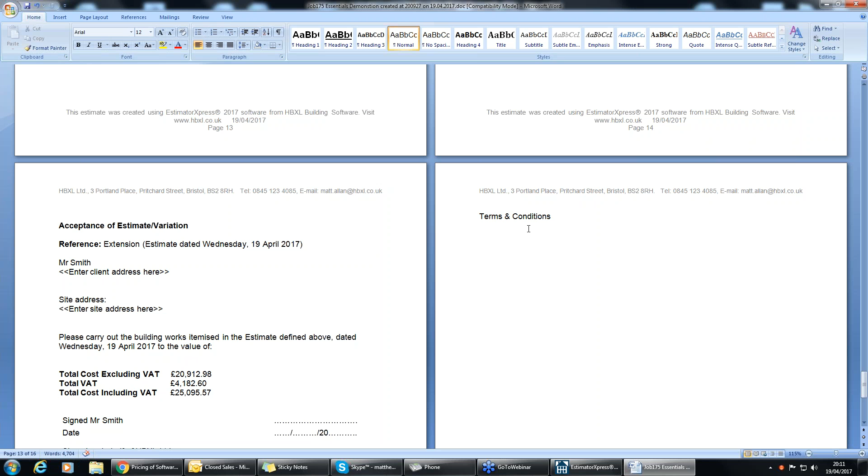Last but not least, what I've got to show you tonight is health and safety—one of the most important things that is basically sweeping across the building game at the moment.

I don't know whether a lot of you are aware of what happens when the HSE go on site and they write you a letter. It's something like 70, 80 pounds an hour for them writing you a letter now that you have to pay, which is, well, it's god awful really.

But what also happens is the moment you have a report put against you, if somebody were to Google your business, the first thing that comes up is the health and safety problem or health and safety situation that came up within your business. So that's something you definitely don't want, because that's just bad publicity.

So we're going to have the Health and Safety Xpert 2017, so CDM Regs 2015, which is quite handy. Every time the software gets updated, it's only because the HSE have decided to do their bit.

Now what you want to do is you either want to go new project, open project, import estimate. So that job we were doing earlier on, Mr. Smith, I'm going to import that. So I can go import estimate, and you've got the essentials demonstration there. So you click next.

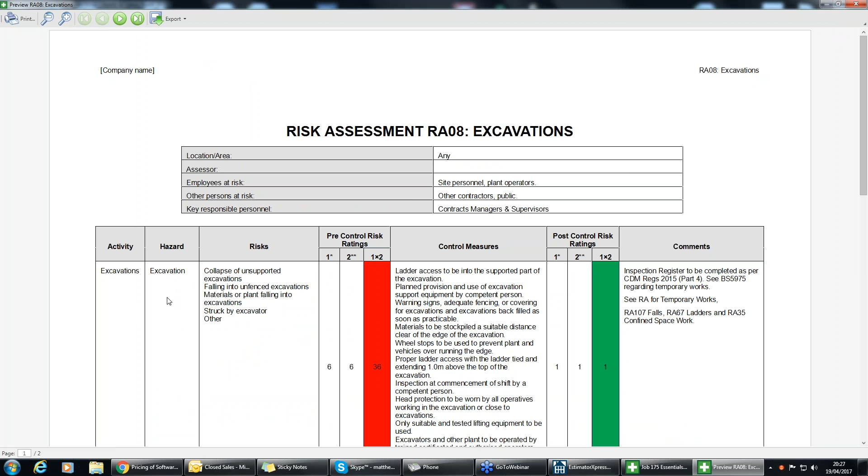If I zoom in here, you've got the activity, the hazard, and the risks - what that can happen. You've got your pre-control risks, what the control measures are going to be, and post-control risks. So if it's 36 and it goes down to 1, you've done a pretty darn good job. And then the comments as well.

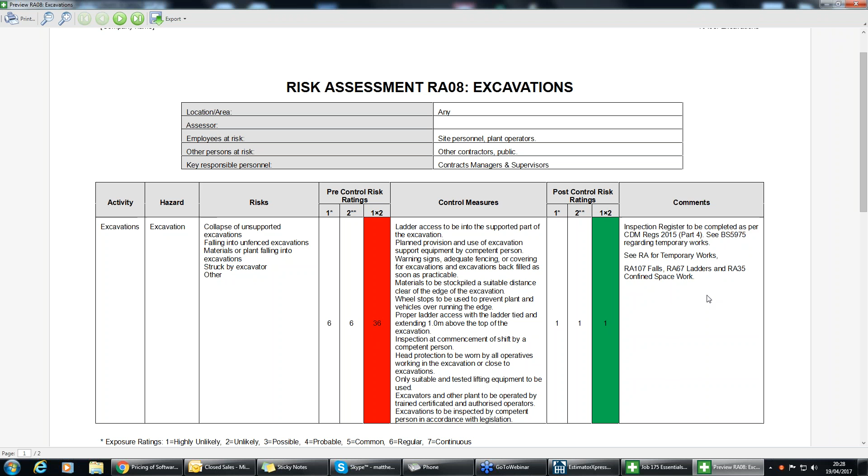Inspection register to be completed as per CDM Regs 2015. You'll find your inspection register within our management documentation.

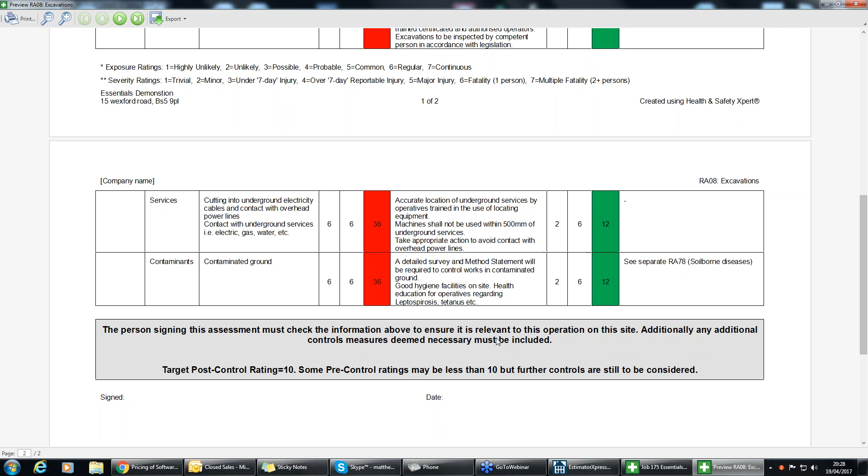You can start seeing the other ones as well, the services, the contaminants. As long as it's signed and dated by the Health and Safety Director, that's absolutely fine, because you're going to have a sheet that your contractors and your guys on site are going to sign to make sure they have seen the risk assessments and the COSHH sheets you've provided. Get them to sign it off, because if they end up falling into the excavation after they've signed off the risk assessment, it's not in your hands anymore, it's on theirs. So common sense.

Going from excavations, we can start looking at buried services. Look at the preview there. Zoom in again - you've got underground services, contact with underground power cables, rupture of gas pipes leading to leaks.

Fires or explosions. Pre-control risks, what the control measures are prior to commencement of excavation. All public and local utilities will be requested to provide information of services in the ground proposed to work area.

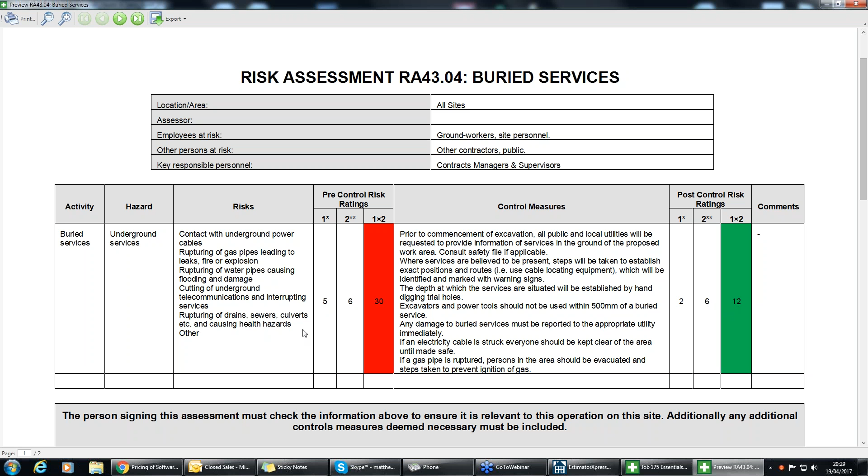Get those post-control risk ratings - so it goes from 30 down to 12. You still, if you put a shovel through an electric wire, that's almost impossible to try and get away from, so there's still going to be a danger there, even if these control measures are in place. Again, sign and date it. Get you guys to look at it, make sure that your hands are clean.

Going from the risk assessments, we've got the COSHH assessments. So we've got, say, Portland cement - have a look at that one. This is quite a funny looking one as well, which is quite handy.

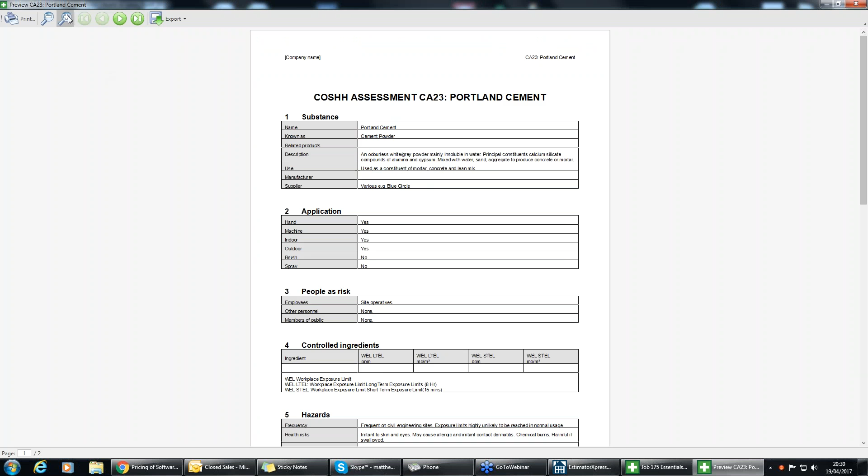If I just zoom that in, we've got the substance - it's Portland cement, known as cement powder. Description: an odorless white grey powder, mainly insoluble in water. Application: are you going to be using it by hand, machine, indoor, outdoor, brush or spray? So it's just telling you the application of it. People at risk: site operatives, nobody else should be at risk.

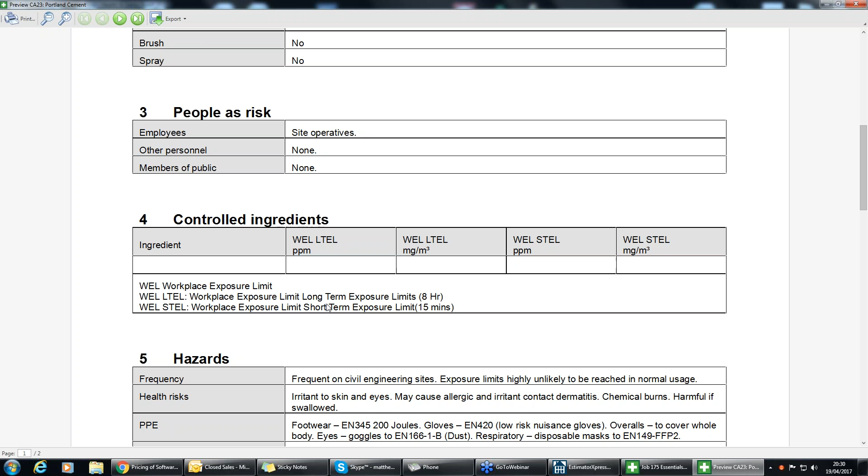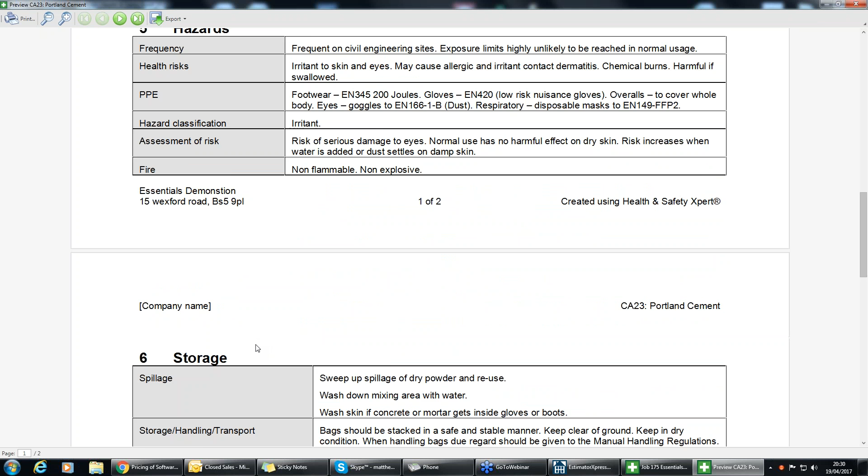The controlled ingredients, the hazards, PPE, risk assessments as well. Storage - sweep up spillage of dry powder and reuse. Wash down mixing area with water, wash skin if concrete or mortar gets inside gloves or boots.

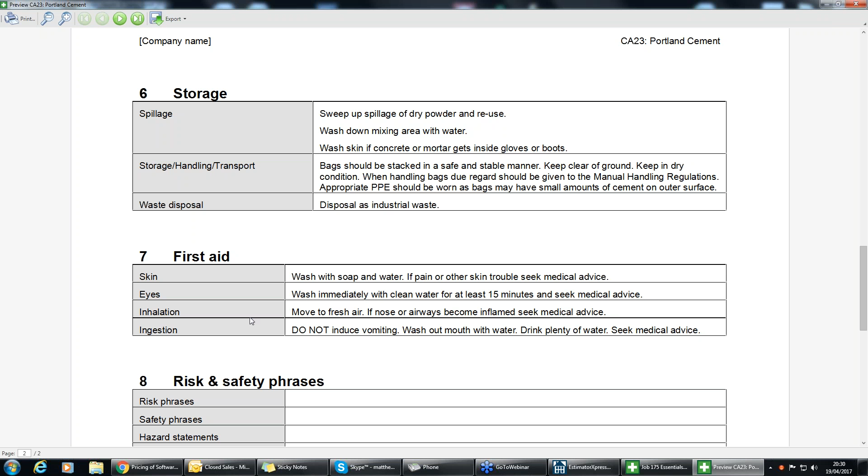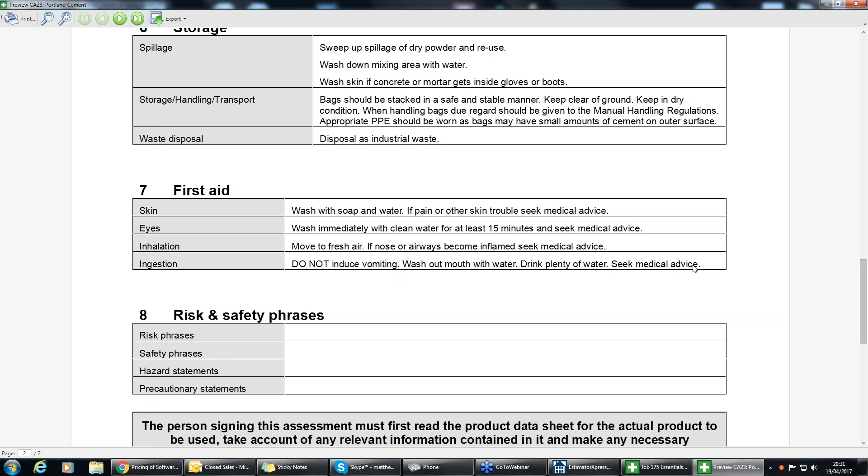The first aid one's quite funny - if it gets into your skin, actually that's not too funny, or your eyes, but then it does say ingestion. So if you've got somebody on site that's decided to eat the cement, to be totally honest with you, I think you're doing the world a service by not calling anyone. But yeah, do not induce vomiting, because the lime in the cement will tear up the throat, so that's going to be quite bad. But drink plenty of water and then seek medical advice, and maybe a little bit of therapy as well.

Risk and safety phrases - this is something that's come in from America. You're not going to find risk and safety phrases on all your materials, you're going to find it on some and not others. Once the HSE updates that, we update it for you, which is quite handy. So if there isn't anything written in there, that just means the HSE haven't updated it yet, and there's no need for them. But again, sign it and date it.

Your quid's in, and then you can start looking at anything else as well, so say mortar, brick dust. Again, same process: substance, application, people at risk, controlled ingredients, the hazards, all the way through to storage and first aid as well. It even says first aid ingestion, so you may have somebody on site that likes to put things in their mouths - but unlikely. Remove patient to fresh air, give sips of water.

And then sign it and date it.

We do have method statement templates in there for you. You may have a client that wants a method statement given to them, so we've helped create those for you.

So you've got industrial unit roofing, brick paving in pedestrian area, confined spaces. I don't know whether you're aware, but you don't have to provide a method statement to a domestic client. To a commercial client, yeah, you definitely have to. However, unless asked, you don't have to provide one. So that's why we have these there. If you need any help writing them up, give us a call and we'll be happy to help over the phone.